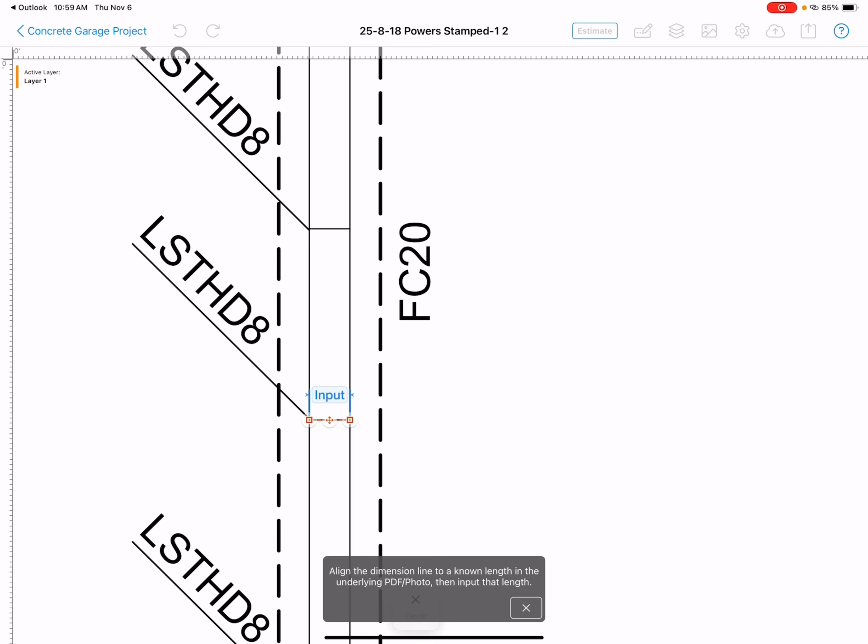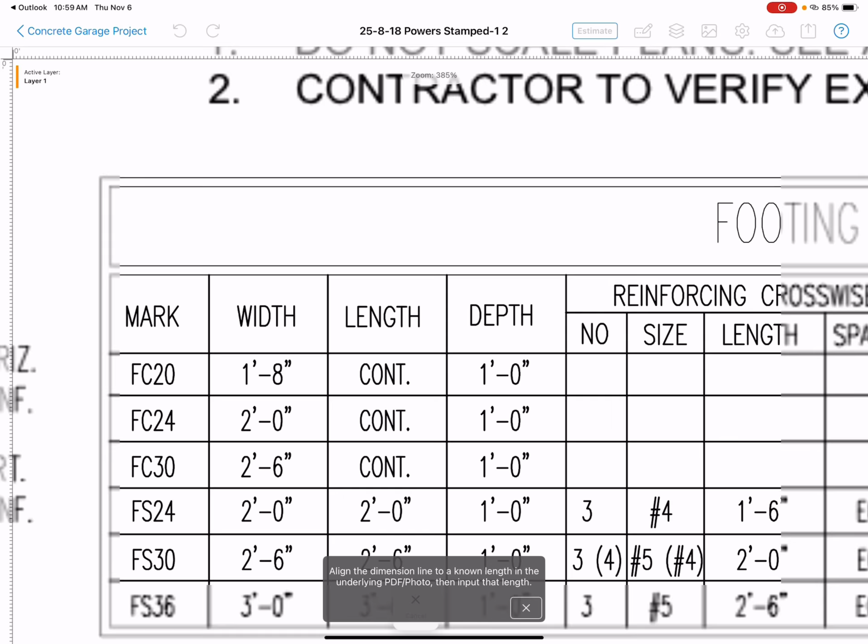For instance, FC20, if you come here, you'll see what FC20 is. So FC20 is 1.8 and it's continuous. What that means is it is 20 inches wide and 12 inches deep. Okay, in the next few seconds, because I shot this video after I shot the other one, I estimated this being 10 inches deep, but just change it to 12.

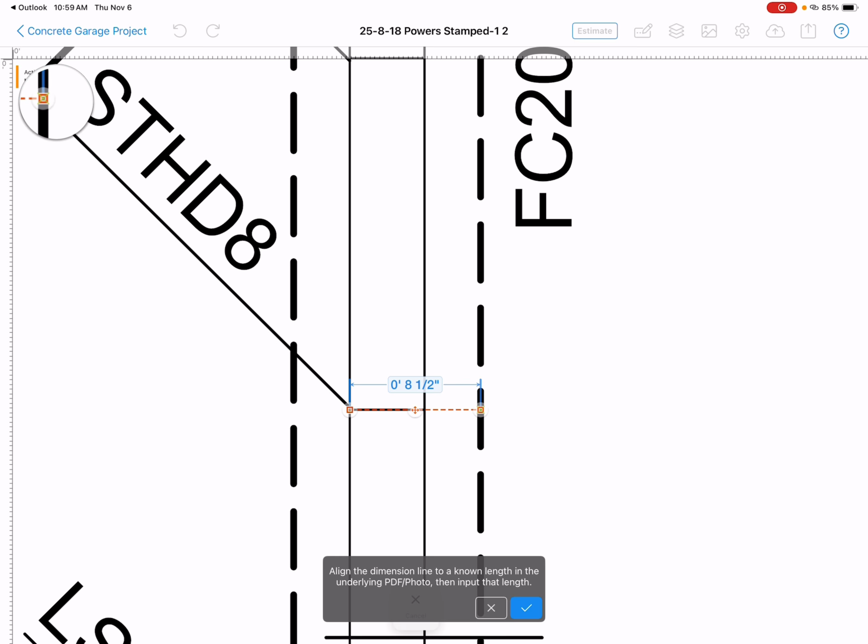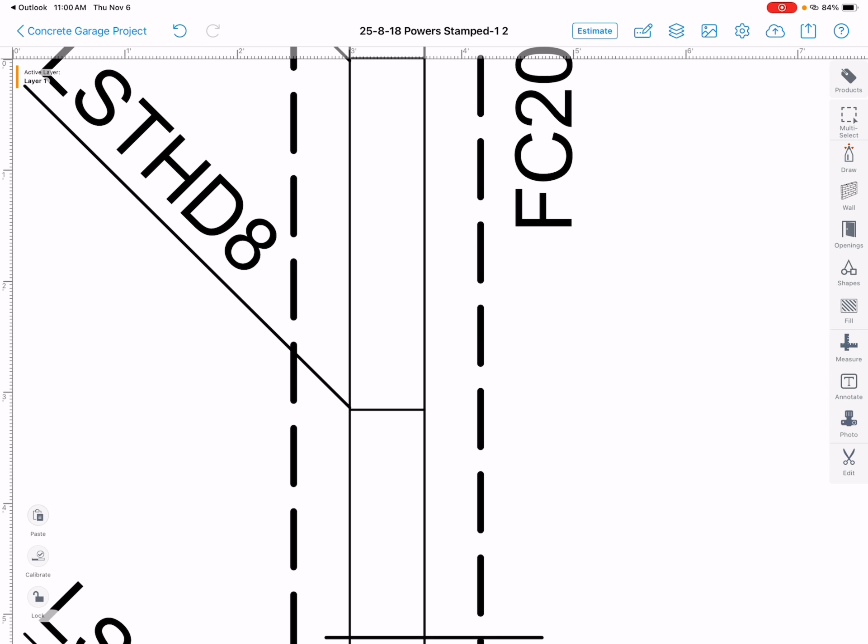Anyways, to calibrate, you come here and you put 8.5. Or you can come here in the footings, which is what we were doing, and you calibrate it with what we just read right there, which is 20 inches. Or you can put it exactly as it shows over there, 1.8, which is 20 inches. There we go, it is calibrated. Now if you open measure right here, measure distance, and you measure this, 1.8. So you got it, it's calibrated.

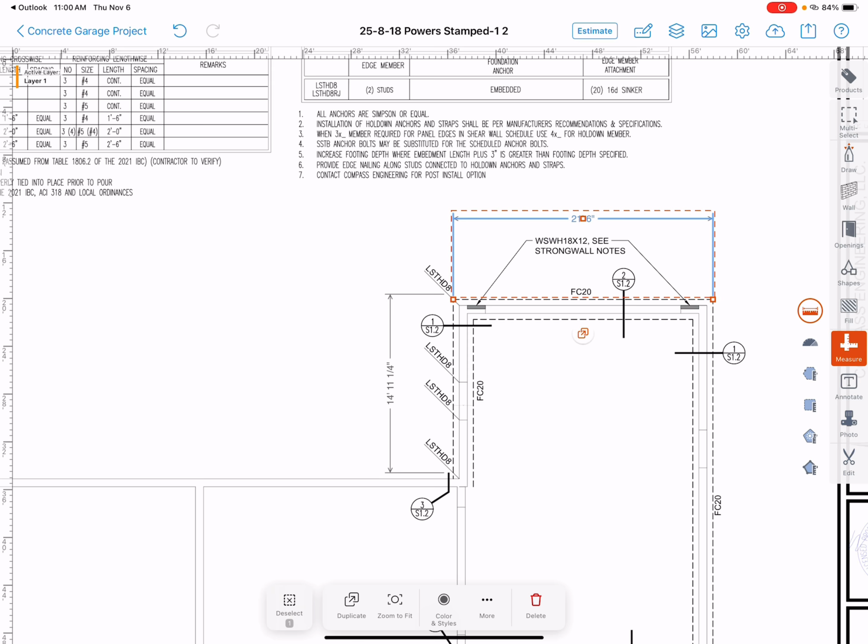Now I just need to measure like this, and always round it up. Right here you got 14, we're gonna count it as 15. Over here we got 21.6, we're gonna count it as 22. Then you add up the linear feet. So we got 16 here, 21 here, 32 here, and 22 here.

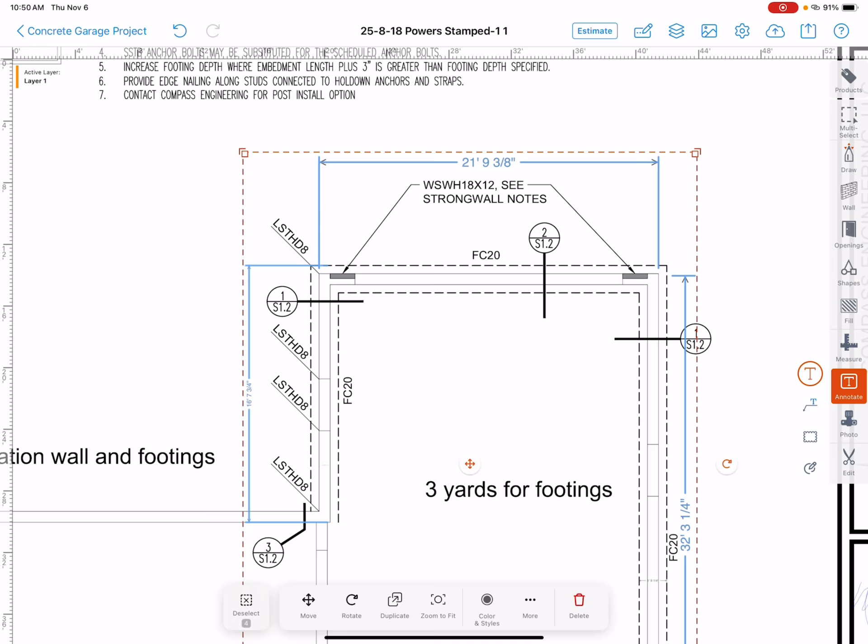So you always round up, like right here is 21.7, you round up to 22. Over here you got 16.7, that means 17. 21.9, that means 22. 32 right here, that means 33. Anyways, I had already done this math and I came up with 94 linear feet of foundation walls and footings.

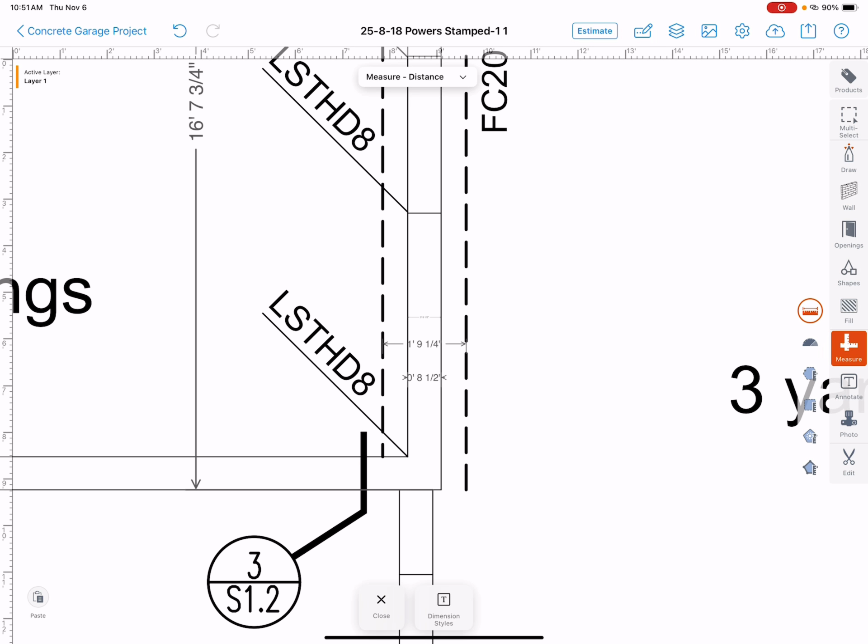Important things to know: the measurement right here, 8.5, that's the foundation wall, that's correct. And right here is 1.9, which is normally 1.8, 1 foot 8 inches, which is 20. So this is good for us to run our calculations. After you find out this information, again, dotted lines are footings, and continuous lines are foundation walls.

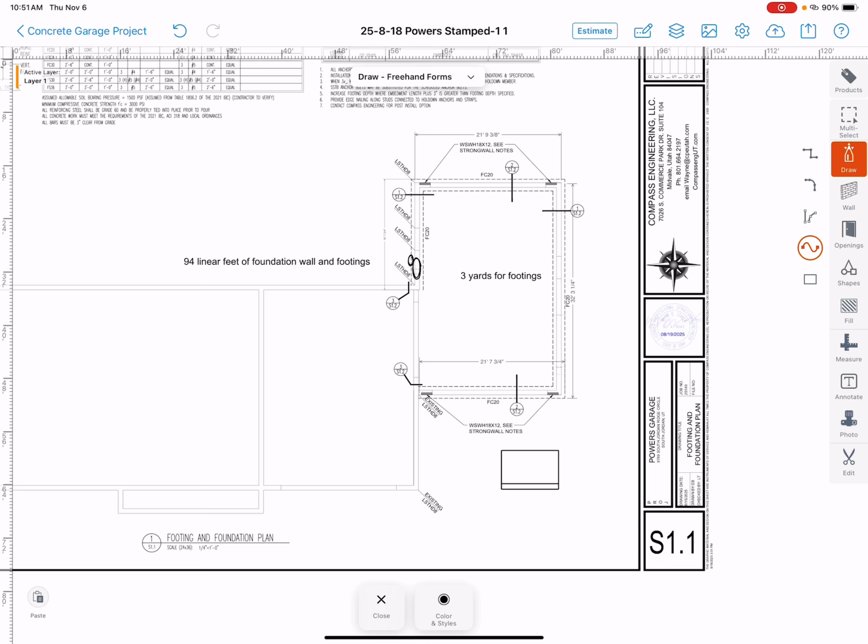I had already checked in other elevations. I don't have these elevations here with me, but normally there is a page where you see the height of the wall, which is right here. This foundation wall is going to be 5 feet and the footing will be only 10 inches tall, and that's what we need. So you come to this website right here, which is Concrete Calculator. There are many, but this is the one I like best.

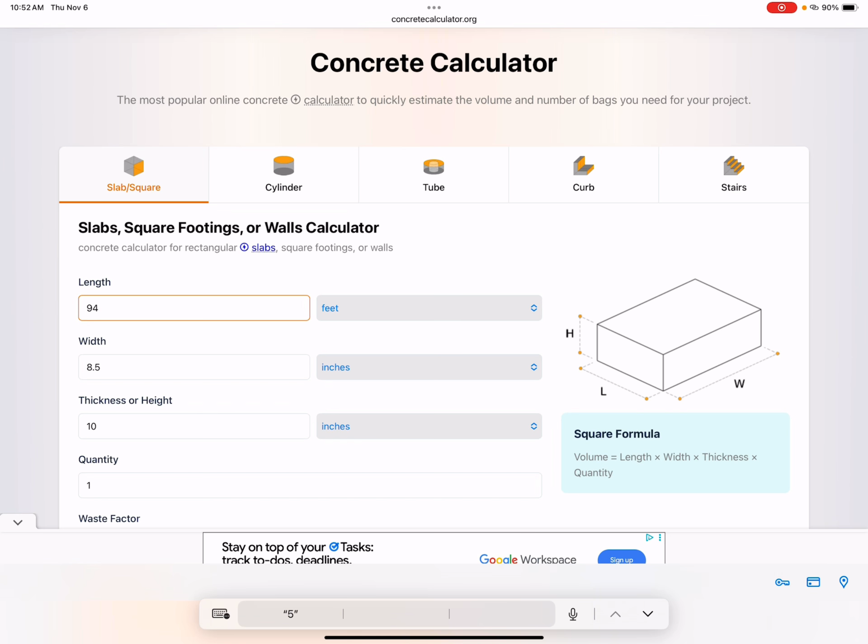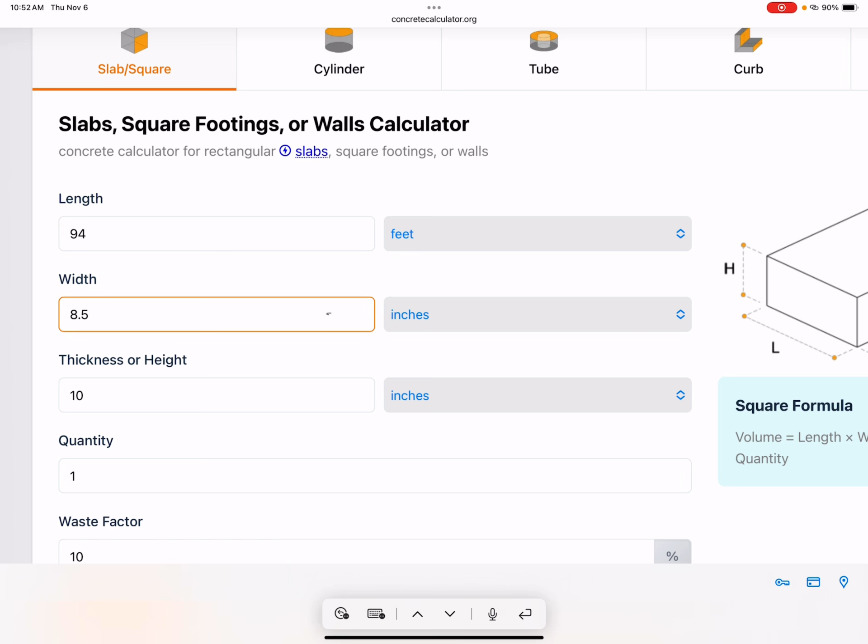First thing, we're going to insert the linear feet that we estimated, which was 94 feet. Always pay attention to make sure the length is in feet. Then the width, and right here you can see the width. It doesn't really matter which one you call width and which one you call height, but I'm gonna call width how wide the footing is, right? And the footing is in inches, so inches, and we come here, 20 inches. And the height of the footings is also in inches, which is 10 inches high.

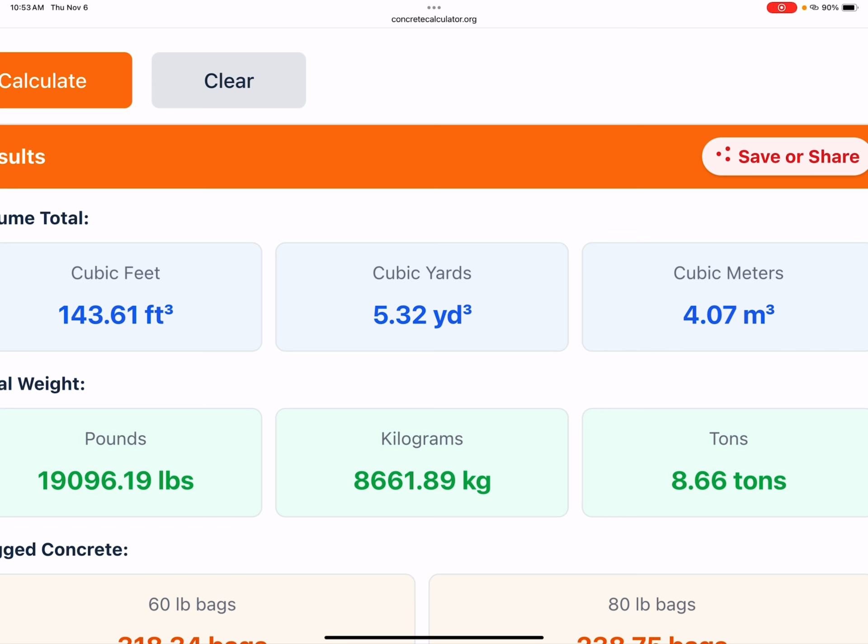And we come here and calculate. They had a waste factor of 10%, which is good, not a whole lot. What matters for us is the cubic yards. So we came to a total of 5.32. We are always going to round up. So 5.32 means that we need 6 yards of concrete. So let me put this here: 6 yards for footings. Now we're going to do the same thing with the foundation walls.

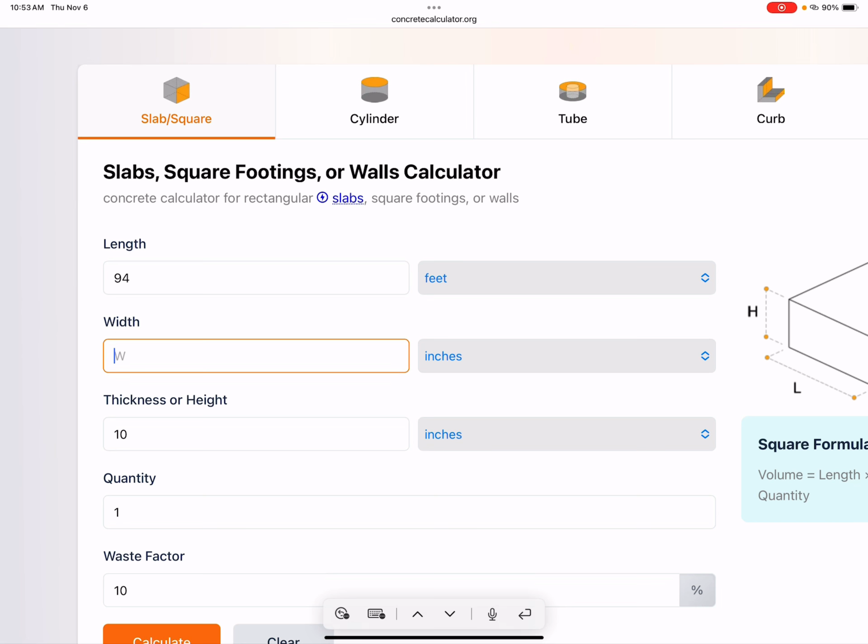The foundation walls, they are also 94. The width of the foundation walls in inches, again, make sure you check here, inches, is 8.5. And then the thickness or height now is going to be in feet, not in inches. Okay, so you come to feet, and when it's a tall basement, it's 8 feet, 9 or 10. Those are the 3 most common measurements. This one is a garage wall, which is 4 feet.

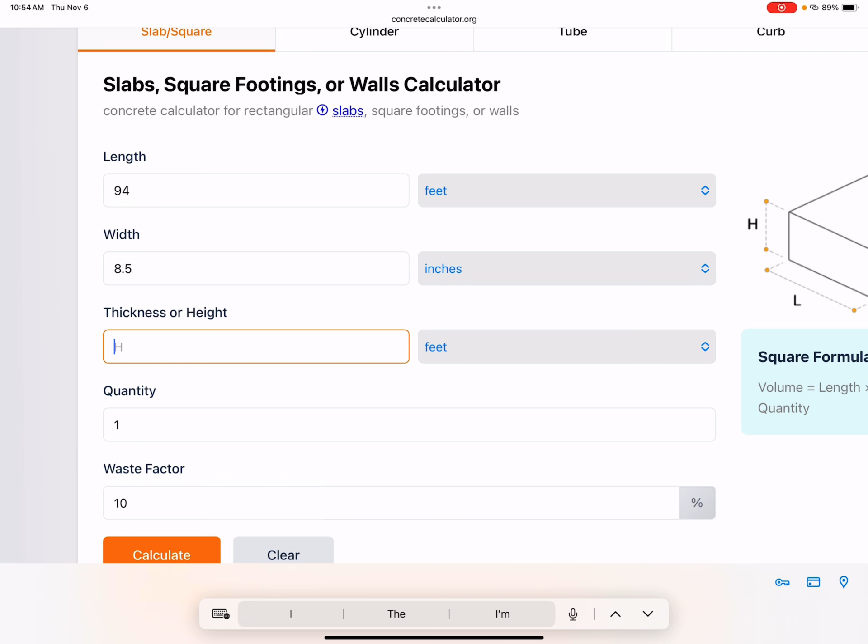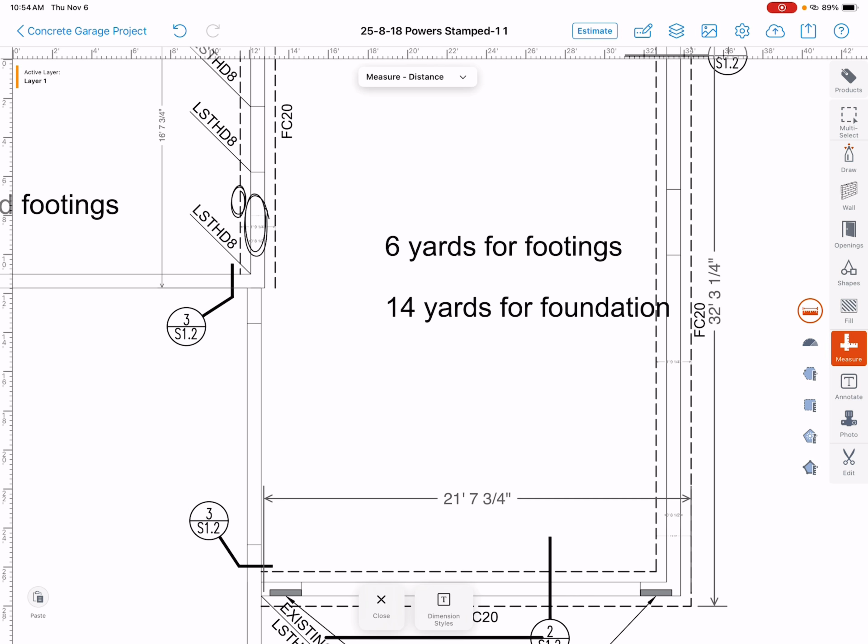Calculate: 13.5, so we need 14 yards of concrete. 14 yards for foundation. Now you add up. Here in Utah, if a homeowner is buying concrete from a concrete place, each yard costs 230. So 230 times 6 equals the concrete cost only for footings, 1,380 before taxes. So might as well call it 1,500.

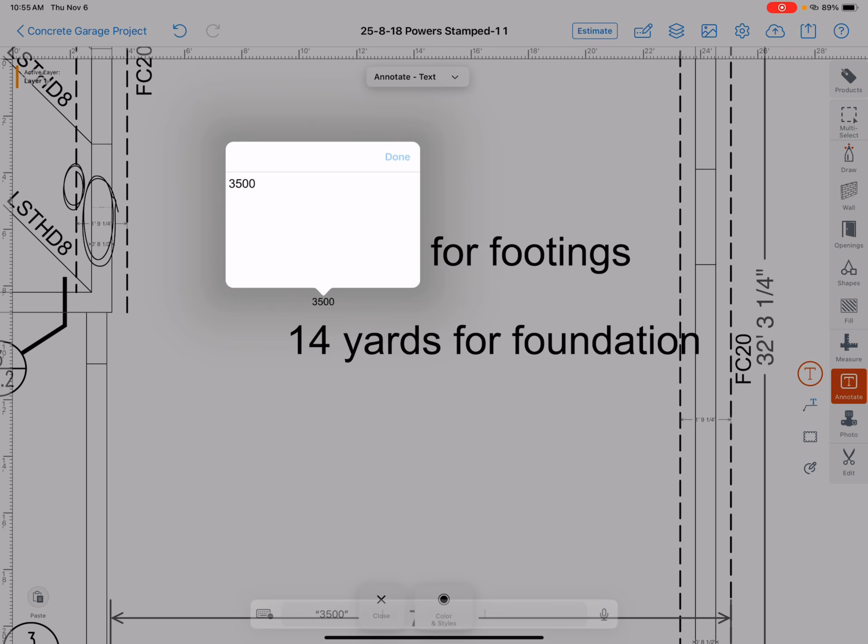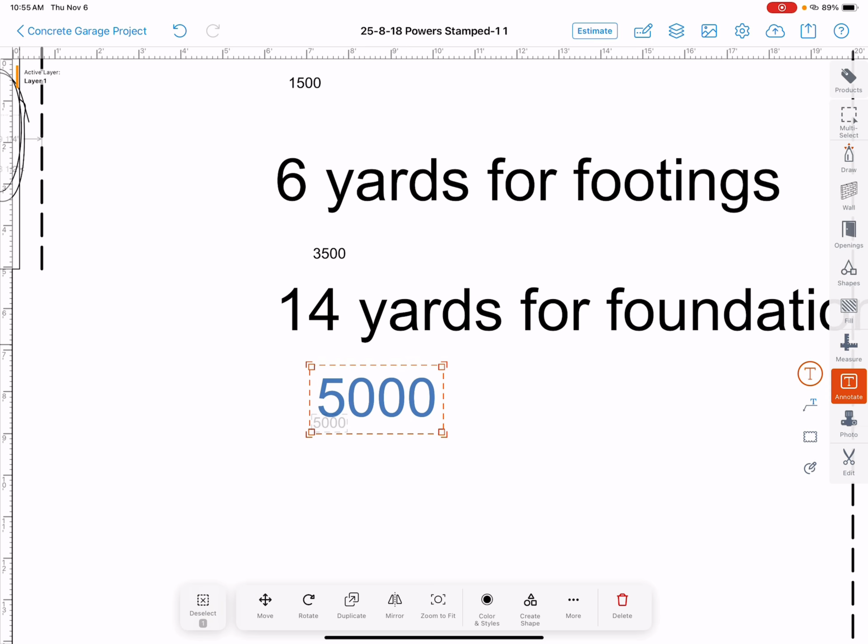And 14 yards for the foundation walls. 14 times 230, 3,220. We might as well round it up to at least 3,500. Okay, so on concrete alone, at this job, we are at 5,000 total. And this is a good start. We know that 6 plus 14 is 20 yards. So we are at a total of 20 yards for this job, which will cost around 5,000,

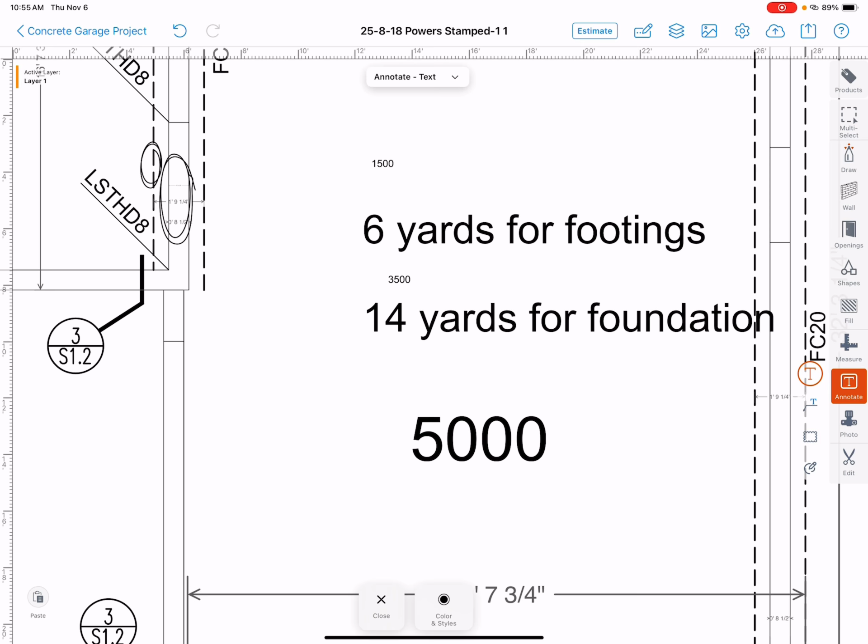could be 5,200. If you are a general contractor or a concrete company that has an account, this concrete cost could drop to 4,000 or something. Now we just need to remember that we still need to add the cost of forming. For the footings, we can form with lumber because it's only 10 inches tall. So we're just going to estimate how much lumber we're going to use.

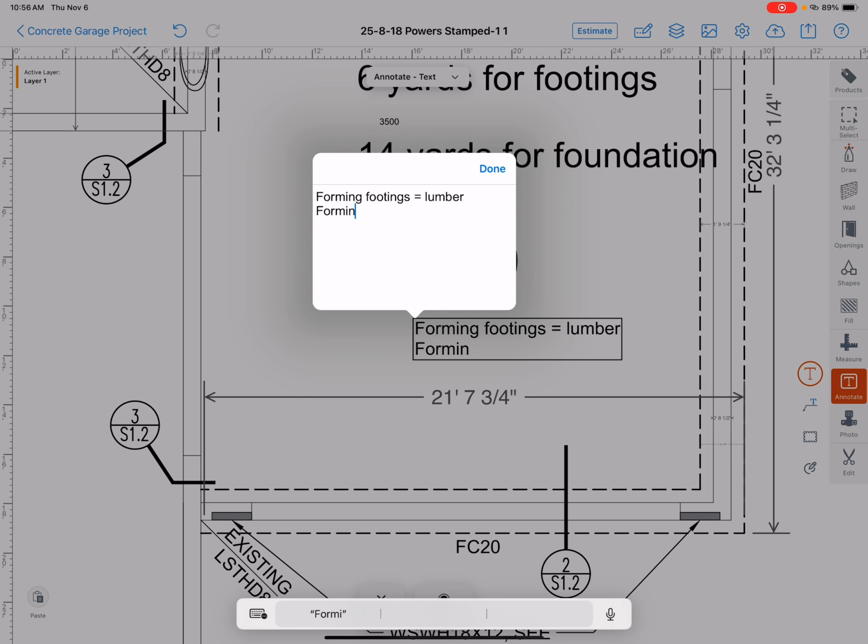For the actual forms for the foundation walls, a good safe number to estimate is $130 per form. I'm going to start another video and I'm going to show you how to estimate the forms.